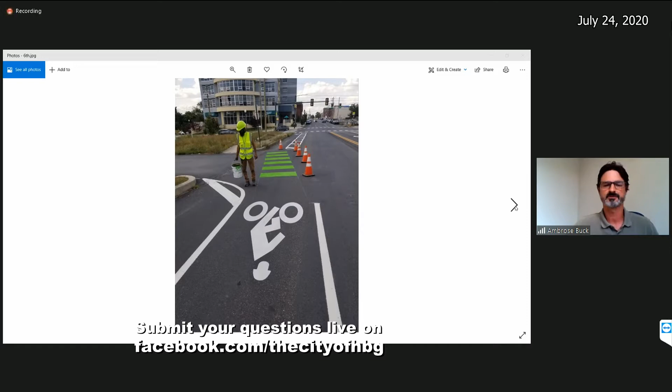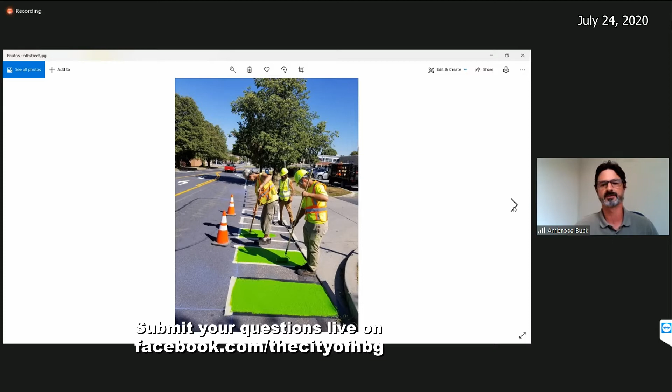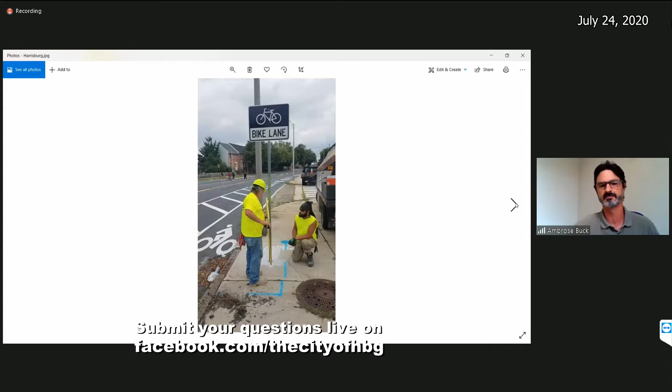Yeah, thanks, Mayor. So 6th Street is what we call a road diet, meaning you end up having fewer travel lanes. That may seem counterintuitive to a typical motorist, but what you're actually doing is removing obstacles to through traffic. On 6th Street, as we go through the photos, you'll see bike lanes in each direction, which removes cyclists from the actual flow of traffic. That allows traffic to continue unimpeded through the corridor, but also gives a safe place for cyclists to ride.

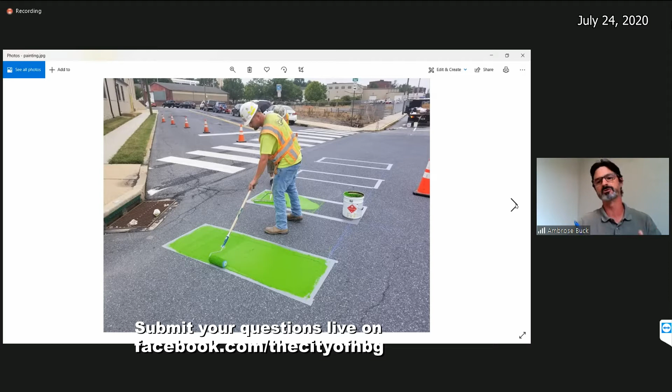Another element of the 6th Street road diet is a school bus drop-off zone, so the school bus no longer has to stop in a lane of travel. It has its own designated space on the road, which removes that obstacle from through travel and provides a safe designated place to drop off and pick up students.

Yeah, and these are great pictures, thanks for bringing them. We were approached by the Harrisburg School District with the problem of Ben Franklin and how unsafe it was during pickup and drop-off times. Part of the solution was as described, but it was done in partnership with them, and it's really a win for everyone.

Another win about the project is that we are gaining parking. I know that many in the neighborhood feel that with the added economic development activity, the new courthouse, there's more and more pressure for public parking. By eliminating that lane, we were able to add approximately 41 parking spaces. So again, we're building the community.

As already mentioned, the city is sensitive to input from the community - not only the residents, but the school district - and we try to work those details into the projects so that at the end of the day they're a benefit to the community. The other side benefit of the parking is it does have a traffic calming aspect to the project.

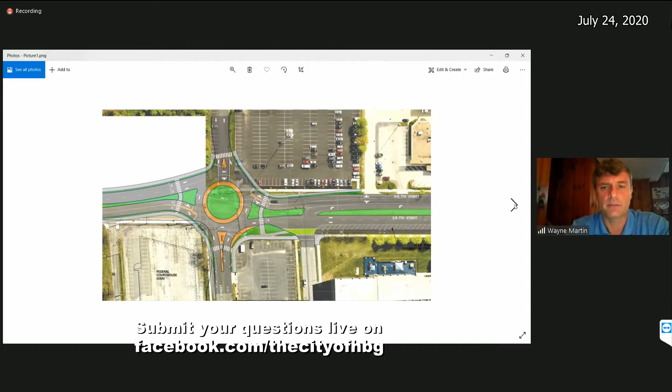Right, so 7th Street, very ambitious project. It takes the widened, improved section all the way down to Herr Street and Boas, where it ties into the state route, and adds a modern day roundabout near the federal courthouse to facilitate traffic flows in and around the courthouse. It removes the angled parking in front of the GSA building and allows for pedestrian access and a refuge island. It does a lot of different things, from traffic calming.

Here's that center median. You're going to have shade trees in the area, reduce that urban heat island effect, and better manage stormwater in the area, which is basically currently all asphalt or concrete. Street trees also have a traffic calming effect, better livability for the city, just an enjoyable corridor to travel once the improvements are completed.

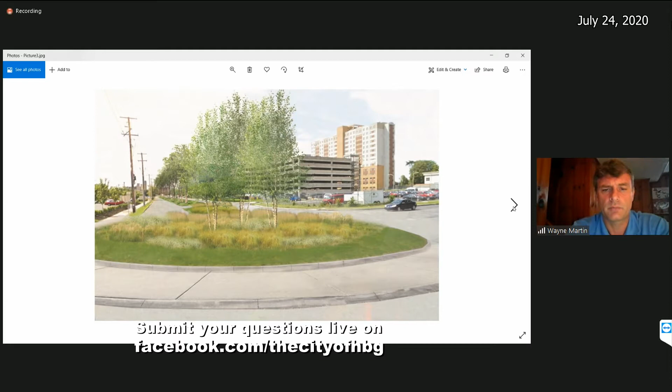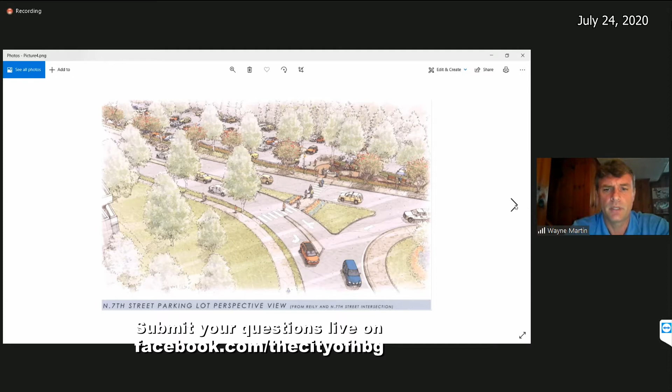The other thing that roundabout does is it's going to allow traffic to basically make 360s, so you can eliminate a lot of left-hand turns, which are particularly issues because left turns create a conflict with oncoming motorists. Folks can do a 360 movement and then make right-hand turns instead of all these left-hand turns that are particularly issues on that section of North 7th Street. So all in all, just a great project.

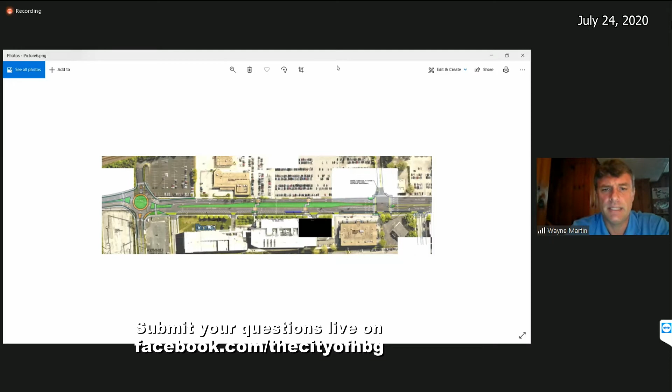We're at 95% design completion. We have our NPDES permit, which is issued by DEP through Dauphin County Conservation District. We're working on right-of-way clearance and the highway occupancy permit, where it ties into the state route. Once we have that final permit and those right-of-ways in place, we can go ahead and bid this out for construction. Our goal is to bid it out end of this year, end of 2020, get those contractors lined up, order their materials, and hit the ground running in the spring of 2021.

That's great, Wayne. Thanks for that update. Between 6th and 7th, you see a contrast in styles and costs. 6th Street was able to be done a little more rapidly because essentially it was paint and a redesign. 7th Street is a little more complicated — we're moving parking, putting in a roundabout and a cycle track and everything else. It's also a much more expensive project, but it's fully funded, grant funded, and people can look to see that actually underway next year, which is exciting. So that's 6th and 7th.

Let's skip to another area of the city now, Ambrose, and talk a little bit about Mulberry Square, because I know people are very excited with some of the blight remediation projects and the new infill development that the Housing Authority has done. It's looking good, but we promised a real upgrade in public infrastructure in that area, and it is underway to some extent, with other aspects in the design phase. So what's going on right now in Mulberry Square that people will see if they visit?

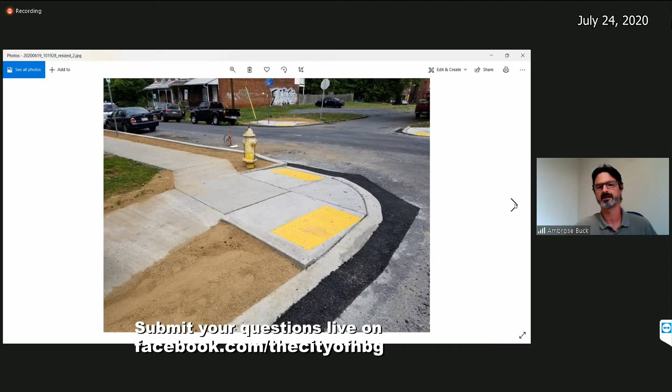This is an area where the sidewalk was in really poor condition. Concrete is very expensive for a homeowner, so this was an opportunity for the city to utilize some grant money to improve these neighborhoods and provide these accessible routes. The future plans call for more development along Derry Street in this area and adding a park at the end of Derry Street, so these sidewalks and ramps will provide that accessible route to the future infrastructure improvements.

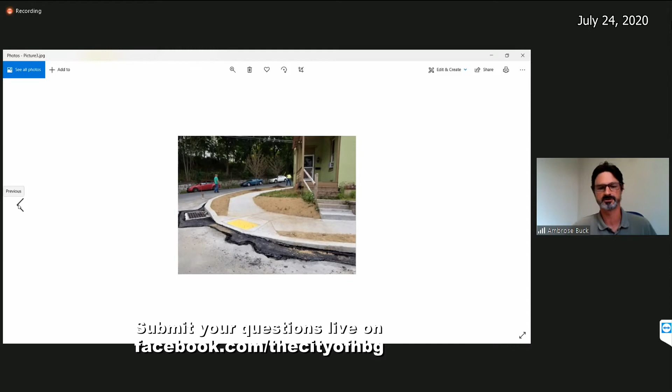Absolutely, and that's one of the first projects that got underway when we were back and able to work, post the shutdown of COVID. It's very noticeable, and it really is just the beginning. When we talk about the city's role and responsibility, it's twofold: to have a vision for a longer term design, but also to really address the public infrastructure as a companion piece to the private investment, the organizational investment, and the community investment occurring all around it.

So Wayne, let's talk to you. These ramps are just the beginning. Mulberry Square was something we received a larger state grant fund for. What can the public expect to see in the next stages of the infrastructure development?

Great, so Mulberry Square actually has 3 different projects. We'll start with the park. Derry Street currently ends at a cul-de-sac, no homes or anything undeveloped, and then there's a set of stairs at the bottom that goes down to Cameron.

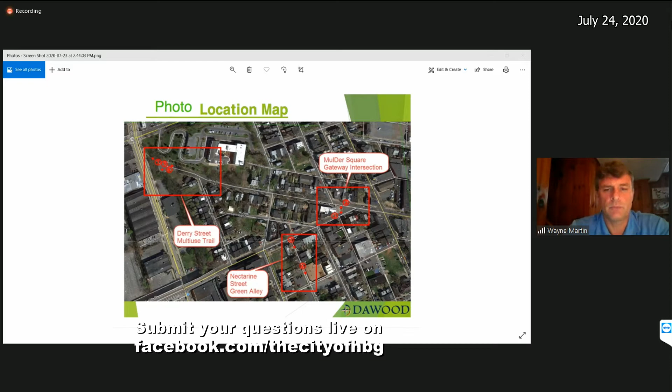One of the goals of Vision Zero is to activate streets, right? So we talk about ADA ramps, and what an ADA ramp does is allow someone with different abilities to get up on a curb or get down onto the street level from a sidewalk. But what it also does is activate the street - we see people pushing baby carriages, grocery carts, whatever they have. It gives them access, activates the streets, reduces crime, and just improves quality of life all around.

So this project will take those steps that are actually utilized. We saw some goat paths and some things through the trees, and so why not build infrastructure where we know people are using it? This green area provides a safe, comfortable place to connect a neighborhood down to Market Street, the bus stops along Cameron, activating another route between the neighborhoods and the downtown area. There's an existing condition photograph of the cul-de-sac on the end of Derry, which is often littered with illegal dumping and things like that. So this is a way to revitalize this area and improve quality of life of these neighborhoods.

Yep, and some of the ramps that Ambrose was describing really allow people to eventually traverse their way safely to the new designs here that you're seeing. Give us a sense of timing for this project. I know it's been in the works for a while, but where do we stand with design and possible construction?

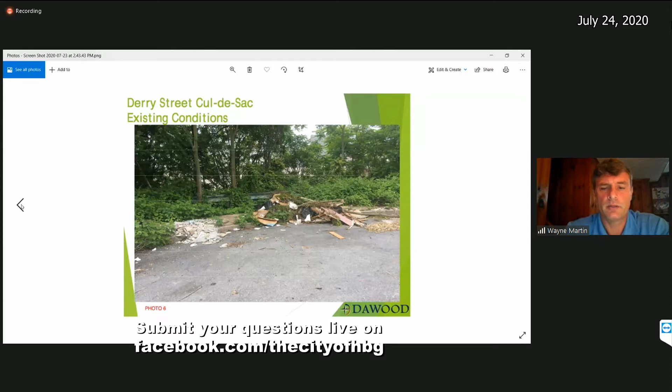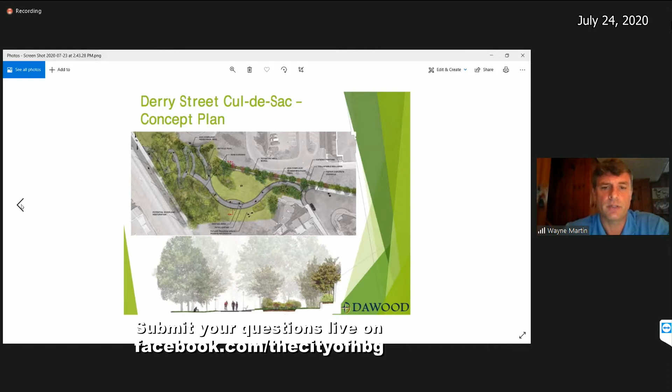So the timeline on this project - again, there's 2 other sites I don't want to miss. One is a mini roundabout at the intersection of Mulberry and Derry. We had extensive public meetings, and to my surprise, the public did have an appetite for mini roundabouts. They're traffic calming devices, they are gateways, right? So they wanted to see that in their neighborhood, and we're going to deliver.

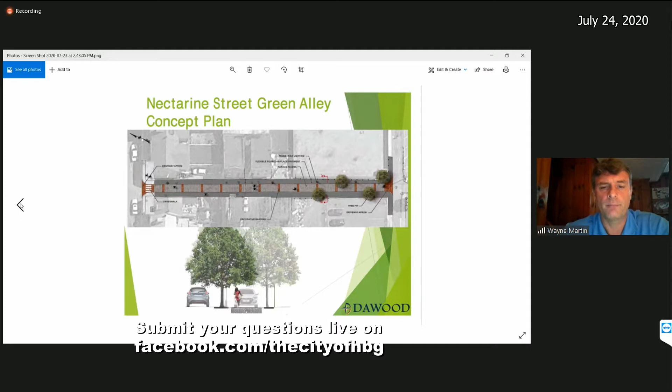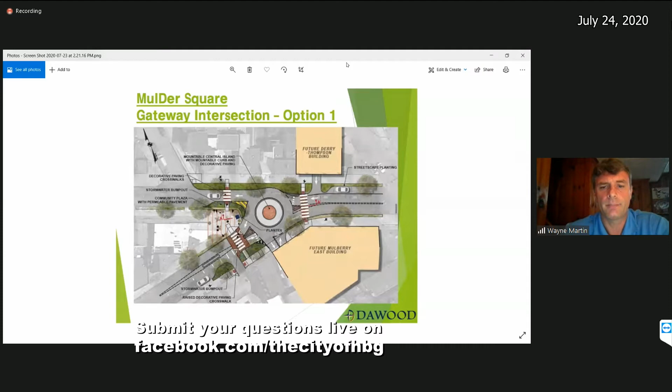The other one is Nectarine Street, and it's an existing alley that's beyond its useful life. We're going to activate that space by removing all the asphalt, putting in stormwater pavers, and allowing green infrastructure - just liven it up. We think it'll activate more for pedestrians than vehicles. Of course vehicles will still be allowed, but when you have predominant pedestrian activity on a corridor, you want to make the improvements for those pedestrians.

So timeline, this one is very similar - this one could actually go out to bid even earlier. This one contains a lot of excavation, and we see that as some available work for winter. Roads and asphalt only have so many months of the year where that work can be done. Concrete tends to freeze, and you have to make certain precautions to pour concrete in the winter, but excavation can certainly occur in the winter. So this one is ready to go.

We're about 90%. We have an HOP permit that we're in the final stages of completing, addressing the comments. This one's tied to some funding - it's an RACP grant through the Redevelopment Authority. We're just working out the details on that, how to get the reimbursement, finalizing the agreements and things like that. But this one could go as early as September, October, with possible winter work in November, December, January, February, with a completion date early in 2021.

That's great. We will talk a little bit about how we're paying for these projects, because it really is a tremendous tying together of a variety of grants and support from different agencies. Just as 7th Street was tied to a PennDOT multimodal grant, this is tied to a state RACP grant, and we want to thank Governor Wolf. This was one of the first grants the city got with the Redevelopment Authority, but working with the city as a sort of direct recipient for this type of work.

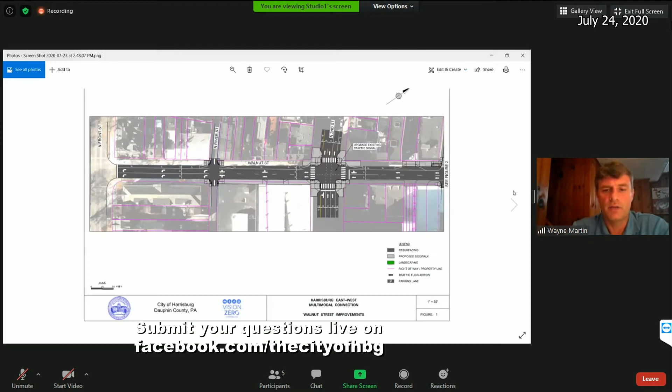Walnut Street, between North Front Street and 4th Street, is due - the condition of the asphalt's very poor. So we just started the design phase last week. There's a lot of concepts to improve this corridor. The one we're looking at here on the screen is bump outs at 2nd and Walnut. We know that intersection will be a complete rebuild, so those bump outs reduce the crosswalk distance and provide a traffic calming element.

Those bump outs were deployed on 3rd Street, which I'm sure everyone's aware of. Also 2nd and Chestnut has that treatment. So that's something we're looking at there. We're also going to consider different parking configurations on Walnut between 3rd and 4th, potentially the addition of bike lanes.

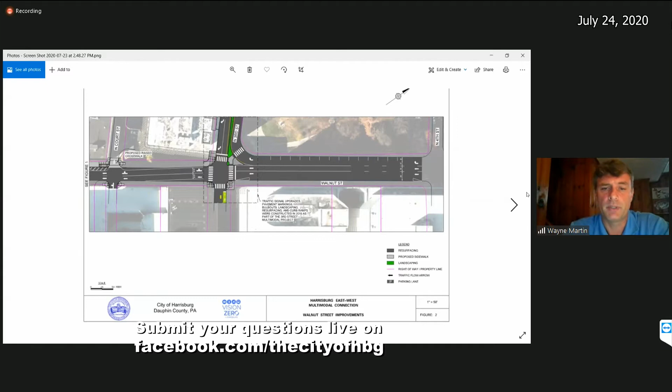So what we're going to do is develop some concepts, and then go out to the public like we always do and see what they like. We're going to talk to the stakeholders - Department of General Services, Capital Area Transit, Strawberry Square, Downtown Improvement District. We're going to work with all those stakeholders, all those residents in the area, see what concepts they like for the project, and then implement the recommendations.

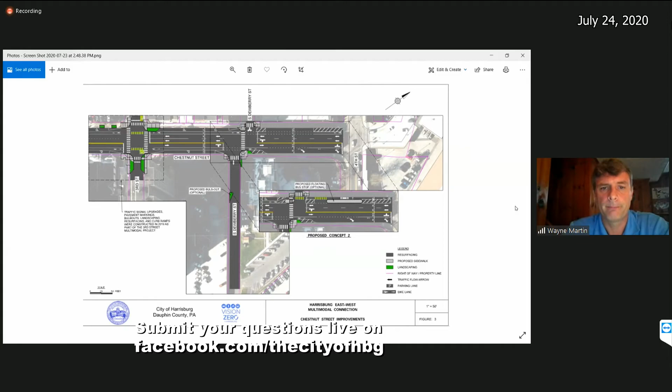That's great, Wayne. The bump outs and improvements on Walnut Street will really help pedestrians. But we already see some of the changes on Chestnut Street, fairly recent. Can you talk a little bit about how Chestnut Street has changed?

Chestnut Street also went through a road diet - we took out 1 lane and added 2 bike lanes. The condition of the pavement is pretty poor, we have some shoving from the buses between 4th and 3rd. So the project we're going to do will improve the condition of the asphalt, and maybe some modest changes, obviously some ADA improvements on some of the intersections there, Dewberry and Chestnut, both sides, east, north and south side of 3rd and Chestnut Street.

It's a great improvement. With Chestnut Street bike lanes, we've connected the Capital Area Greenbelt with the Amtrak train station - that was a big multimodal connection. With that connection and the ability to take the Greenbelt all the way up to, say, Reily Street, it actually enabled the federal courthouse to get a LEED certification, a green type certification for their building, because you now have bike amenities from the train station to the new federal courthouse.

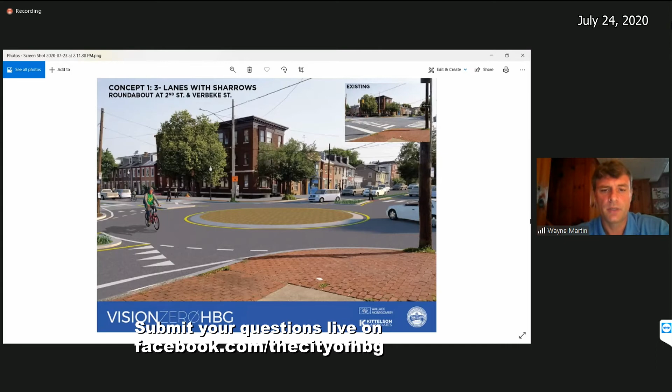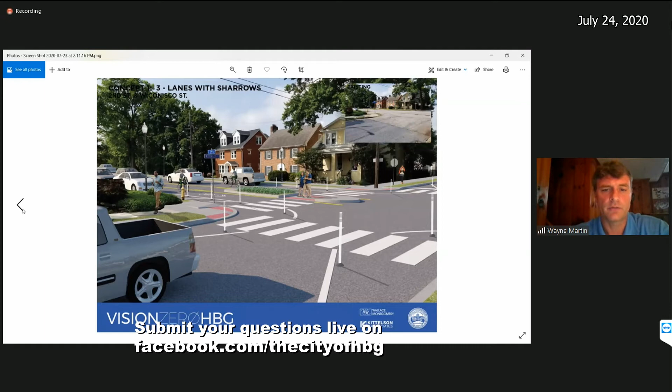The project is entering the final design phase. Our anticipation is to complete that this year, get it out to bid this winter, and have a construction date in the spring as well. Some of the ramps will start this fall - we've already bid out about 28 ramps. Capital Region Water is going to be working this summer and fall on some inlet replacements and sewer line replacements, and of course UGI is just finishing up their gas main replacement. So there's a lot of construction activity that took place before the city comes in to do the ramps and the roadway repaving.

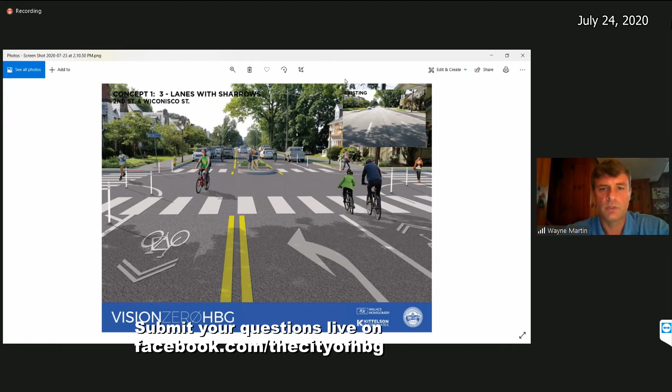I do want to thank Capital Region Water, I do want to thank UGI. It's very important that those utilities coordinate with the city and that the city coordinates with those utilities. I was asked one time, what makes a smart city? And someone else had answered, it's the city that coordinates with the utilities before paving, because the last thing we want to see is brand new paved roads put down at taxpayer dollars get ripped up because of failure to coordinate with utilities.

So that project's on track. Now, one thing I do want to bring up to the public, it's maybe a slight change, or maybe they weren't considering it, but it will probably go two-way—I say probably because of the contractor's means and methods—but the plan is for it to go two-way right at the start of construction.

What that does is a couple things. It allows the temporary traffic control to operate in a normal manner, and it tests how effective a two-way conversion will be before building it out.

So we've been doing the traffic analysis. We spent a lot of money doing a full-blown traffic analysis of what this conversion would do, and it actually improves traffic flows at all the major intersections in the area. So we want to make sure our analysis is true, the models are correct, and we'll have that opportunity to test during the early parts of construction.

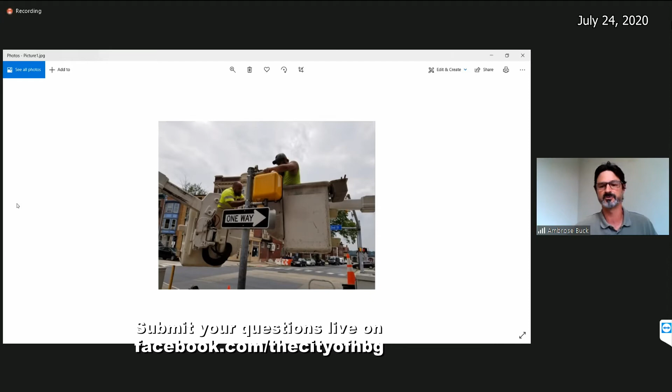And I just want to mention, part of those signal improvements are priority signal changes for emergency vehicles. There's a system called Opticom—when an emergency vehicle approaches an intersection, the lights will change to allow that emergency vehicle to pass.

Yeah, that's important, and the upgrades are really noticeable and incredibly beneficial. That should explain to people a little bit more about what they're seeing and why. Again, we've used our high injury network as the background for how we prioritize these signal improvements and pavement marking upgrades. So thank you for that, Ambrose.

And Wayne, let's end on State Street. This has been a source of constant concern and frustration among many in Harrisburg. Unlike other city streets that we have control over, from the very beginning with State Street there's had to be a negotiation with the Commonwealth over what improvements will be allowed. Can you talk about that and give us a status report on where we are, because this is the top priority in terms of the high injury network? It is a top priority of mine and of City Council's.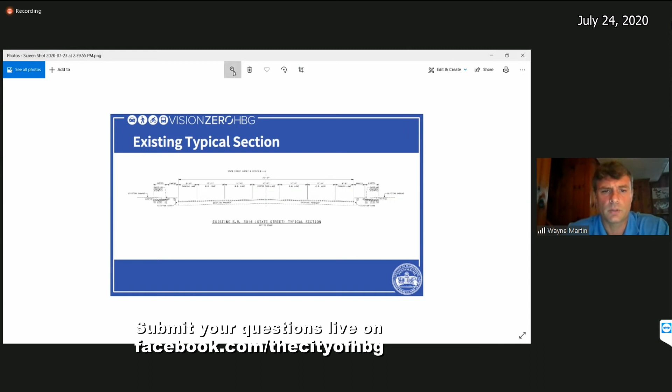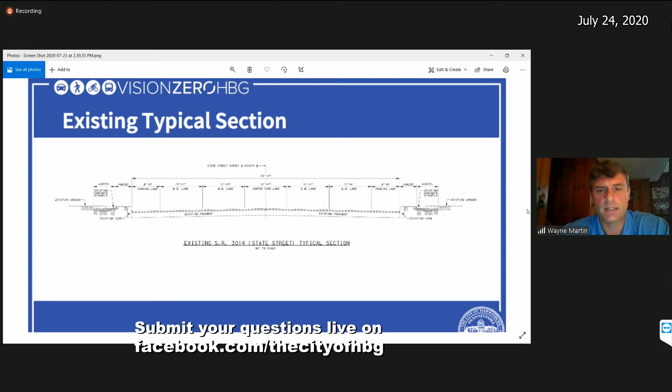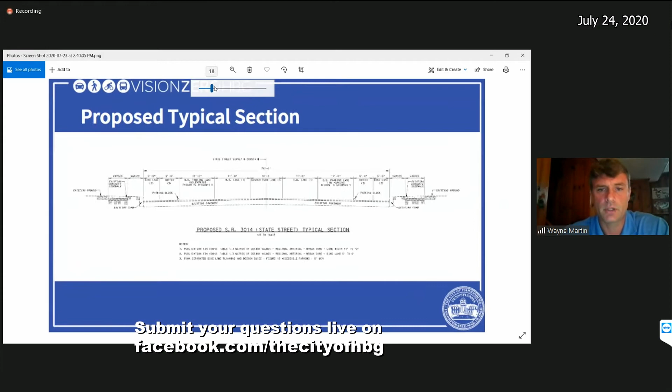So here's your existing typical section. I think part of the reason State Street has had so many injury crashes and fatalities is just the enormous crossing distance of this corridor. It's huge. So one thing we want to do is allow pedestrians a shorter place to cross, narrow those lanes. When you're in a motor vehicle traveling down a 12-foot lane, that's plenty wide, and speeds get up. We were measuring speeds in the 50-mile-an-hour range, and that's through a school zone where it's 15 miles an hour. So we want to tighten those travel lanes down.

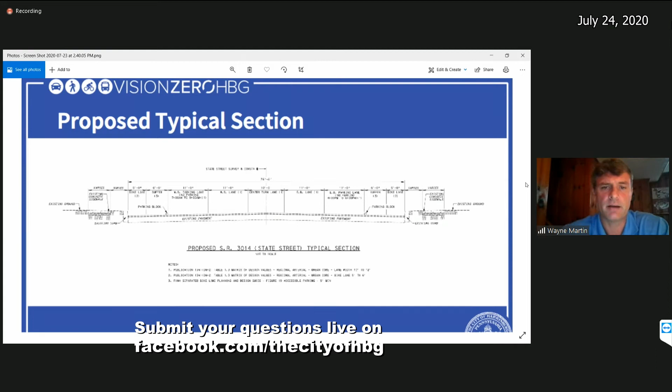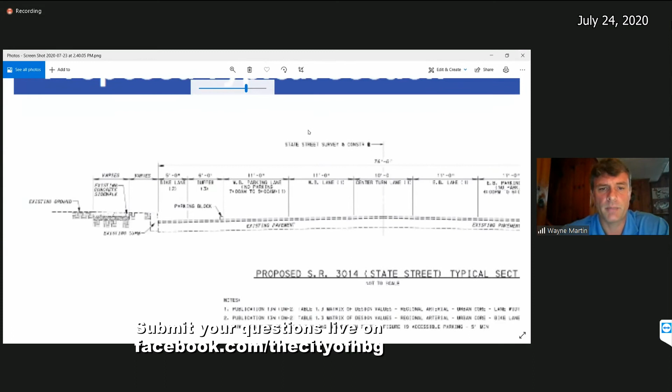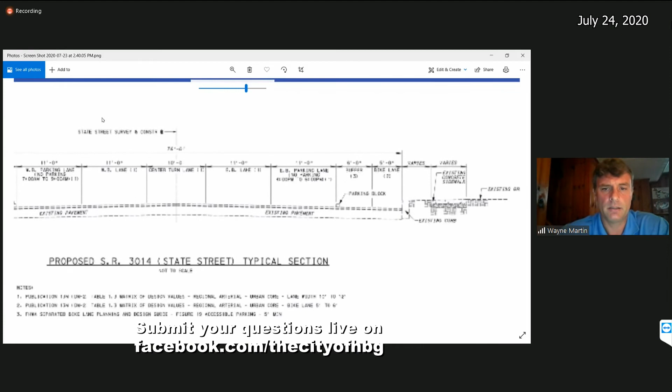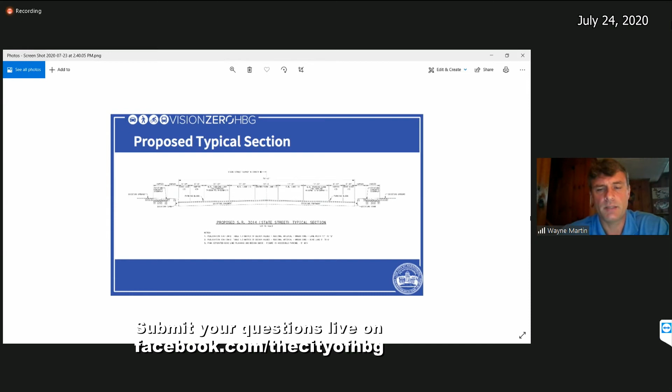Also, one of the more recent fatalities was a bicyclist. Bicyclists use State Street very extensively. It connects neighborhoods to the downtown area. It also bisects the Capital Area Greenbelt, where it ties in at Civil War Museum and Parkway Drive, and there's bike amenities there. So we're going to add bike amenities, and the proposal is to have parking restrictions during peak hours. Much like through Paxton Township, where parking is permitted, and then during peak hours—PM peak would be in the eastbound direction, AM peak would be in the westbound direction—you'd have parking restrictions, two hours each day per side, and we'd separate the bike lanes from the parking lane with concrete blocks.

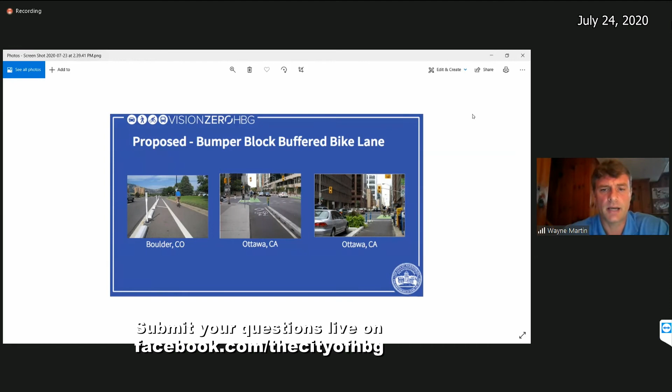So that's the proposal in front of PennDOT. PennDOT has generally signed off on it. There may be some signage and things like that we need to add. We're going to do more public outreach, because this isn't the project we originally sat down with community action leaders and residents of the corridor and brainstormed. It's a little different in that it has some parking restrictions, but it's definitely a safety improvement.

In addition to that, we've been making modest safety improvement changes to the corridor. We did improve those intersections, like Ambrose mentioned—high visibility crosswalks, reflective backplates, 8-inch heads, new push buttons throughout the corridor, and pedestrian countdown signals.

We also have some lighting upgrades scheduled to occur this August. Every one of those post-top lights will be replaced with a brighter LED. The current LEDs are there, but these are brighter, more lumens—LED technology continues to advance. We're also going to turn the lights. Currently they sit perpendicular to the road, so we're going to turn those tops. Actually, they've already been turned, even though they're the old heads. That spreads the light out across the corridor.

So this project, we have to continue to work with the Commonwealth, and we're real close to getting a delivery date on this project.